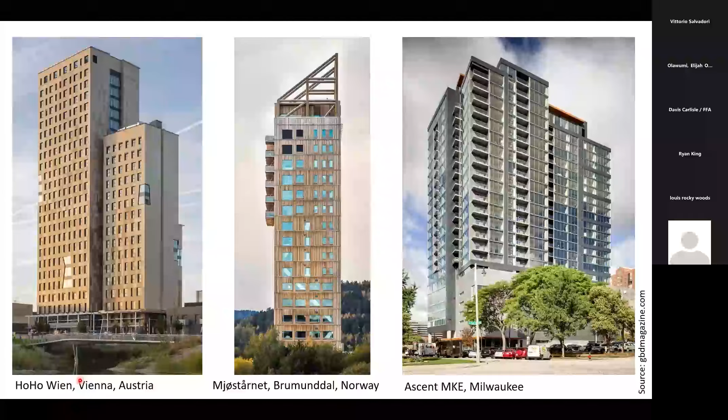So mass timber, these are the prime examples of what comes to mind when we talk about mass timber, from the forest to the tallest buildings ever made by humans in wood, right? The HoHo in Vienna, the tall building in Norway, which once was the tallest, the Milwaukee building, which may still be the tallest mass timber building in the United States. So these are the prime examples. This is what we are proud of, right? The white unicorns, things that stand out like the Eiffel Tower, and demonstrate the ability of the industry.

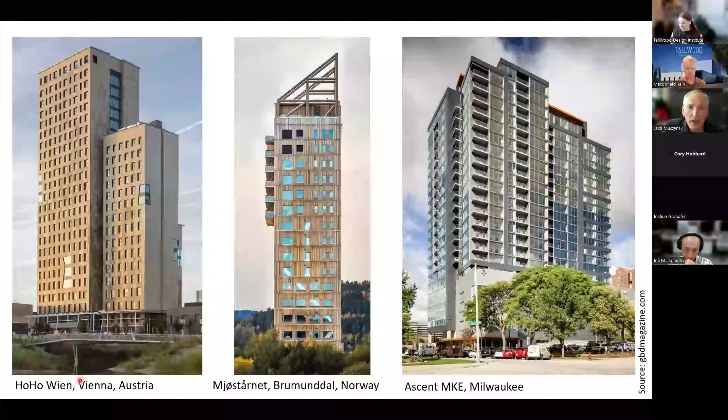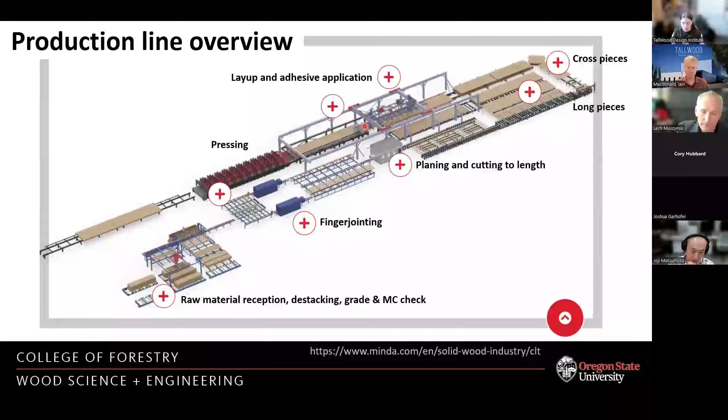Laying up needs to be one layer of lumber, then a layer of adhesive, another layer of lumber, this would be the cross layer, another layer of adhesive, another long layer of lumber, and so on, as many times as many layers as you would need. Followed by pressing. These are large area presses that first popped up specifically for this kind of product. There wasn't anything like this in the world before CLT arrived. Well, there were big LVL presses, big plywood presses, MDF presses, but nothing of this size and capacity. And at the end, the panels are CNC machined and finished.

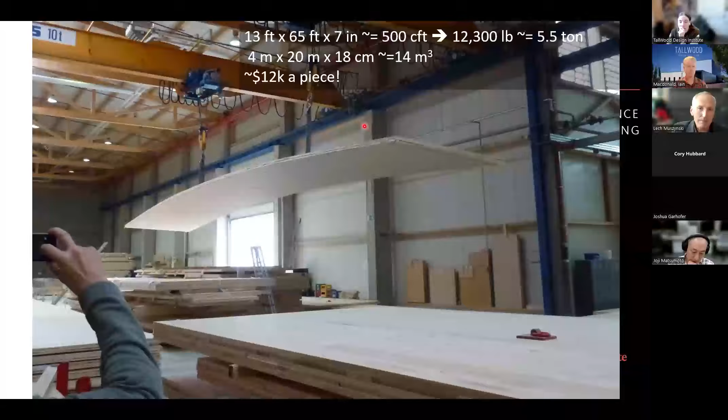The result may be quite impressive. It's up to 13 feet in width, 65 in length. This would be about half a thousand cubic feet, right? Or I'm more familiar with cubic meters, so it would be about 14 cubic meters. It may weigh about 5 tons a piece and be quite expensive a piece, which is going to be important as we go further.

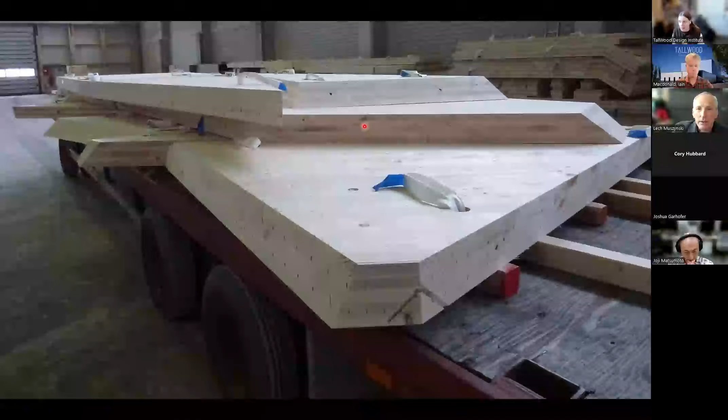Now, this bulk, the mass of timber, gives it the unique fire safety feature. It does not burn easily, and it's not easily engulfed in flames. It's exposed to fire just from one side. So this is an attribute that we like to brag about. And then CNC machining allows us to cut it in all kinds of intricate ways.

This is important because panels, when you work with glulam beams, beams need to be elaborated at ends and at places of support, but this is it. Now, panels need to be connected with other panels, and then they need attention around the perimeter. And then you may want to cut openings in them, and some of them do not have to be rectangular.

All of this can be done on big CNC centers. If you don't know what it is, it's like a large robotic frame that handles machine cutting and machine finishing tools, molders, saws, and follows pre-designed shapes, and can cut at any angle you may want.

Now, essentially, this is an old story. If you think of the technology, there is not much new in here. The cross-laminating of wooden elements has been known since Egyptian times, right? They were like cross-laminated slices of veneers used for fine furniture. But the first modern patent for what we now call plywood was issued in 1865. Then followed by the first adhesive bonded glulam used in Europe in the late 1800s.

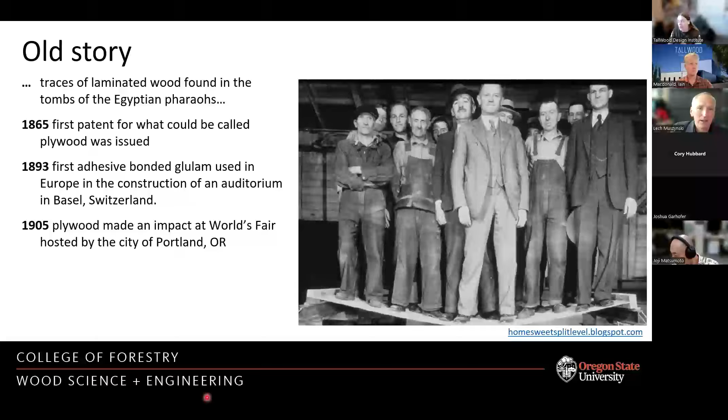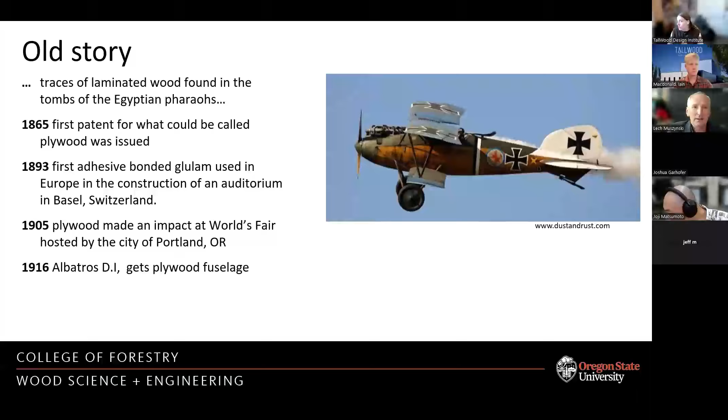Then in 1905, plywood made an impact at the World Fair hosted by the city of Portland in Oregon, where Iain is sitting right now. Plywood shortly became a strategic material, right? Used in fighter planes, even in the First World War, even more in the Second World War. This is actually what propelled the science of layered composites before carbon fibers and glass fiber composites appeared.

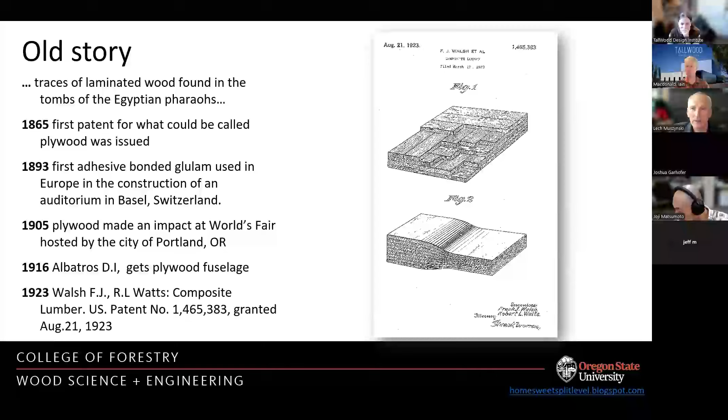And then in 1923, we find there was a patent for something that looks eerily like cross-laminated timber, if you look at figure one. So essentially, there should be no surprises in here. In 2013, architect Michael Green, in his TED Talk, referred to CLT as plywood on steroids, right? There's a quick connection. Conceptually there is no difficulty in here.

So today this should not be a new material for us, and yet the industry continues throwing surprises and posing baffling puzzles for us. And not the least important of them would be the uneven pace of developing production capacity. When we look at the global regions, at certain places it seems to go faster, at others slower, but even more unsettling, the uneven rate of attrition across the main regions. By attrition, I mean some companies fail, and in some regions, more of them than in others.

Yeah, things happen. If you look at this list of CLT facilities, CLT plants, lines being closed, repurposed, repossessed, collapsed, or burned, or restructured, the list is very long. The unsettling thing in here is that in the last 6 years, actually less than 6 years, North America lost 5 major CLT operations. Yeah, they have been restructured, right? But something went wrong in there.

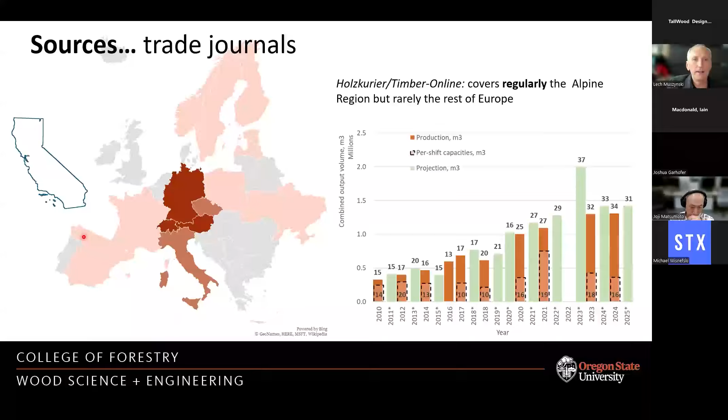Now, by comparison, if you want to see the scale of how big this area is, it's about the size of California, right? Not the least of the states, not the largest, but this is to scale.

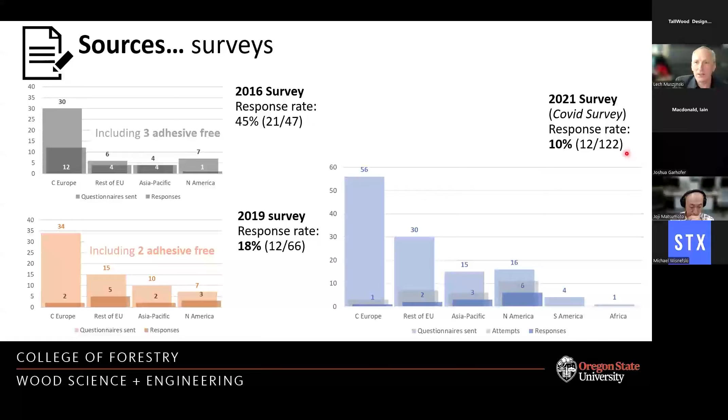So now the other source is surveys. We've conducted a total of 3 surveys, with the first one being most successful with the greatest response rate. And then as we went, probably manufacturers got tired of everyone asking them questions and sending surveys. The return for the effort was diminishing. And you can see that the last survey that we sent to a whopping number of companies, 122, got just 12 responses, 10%. At this point, a much better source of information is direct site visits and interviews with companies and company representatives at trade shows and so on.

So when I interview people, I have had a semi-structured questionnaire since 2017. Before, it was more open-ended. And this questionnaire is evolving to harvest as much information as I can. Now, in terms of the site visits, quite often, and then I had to make it a blanket policy, I could not take pictures that could be published anywhere or shown. So I'm going to avoid showing you pictures from individual sites, except for the few for which I have a specific agreement to share the image. Otherwise, I'll be just showing aggregates that will not allow you to track the data back to the original source.

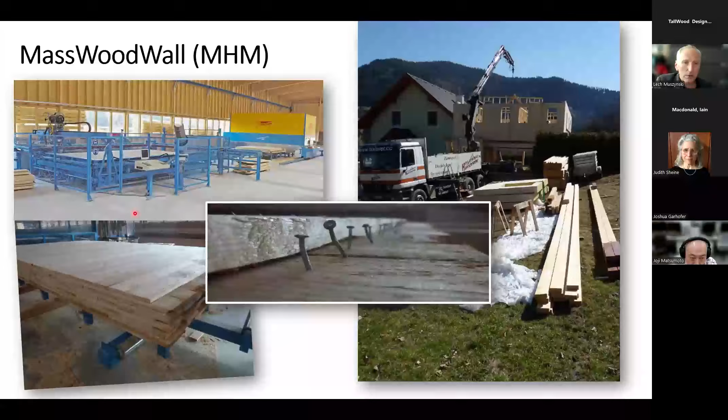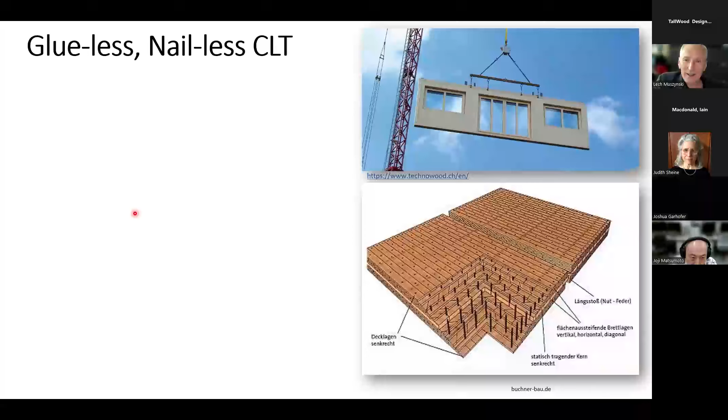The other glueless and nailless option would be dowel bonded cross-laminated timber. For a long time, I believed this is just an academic exercise, but no, there are companies that do this in real time. There is a company called Technowood who produces entire turnkey, highly automated robotic production lines for this. There are currently about 12 companies doing it that way, mostly in Switzerland and Austria. So this is just a footnote that what we call cross-laminated timber may have many flavors beyond what we imagine as an adhesive bonded cross-laminated panel.

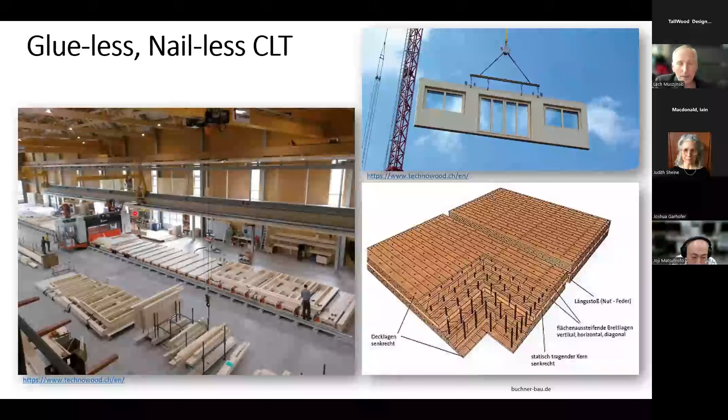Another flavor, this picture, sorry, is historic. This company does not do it quite that way any longer. They are still in operation, still do glueless and nailless CLT, where cross-laminated panels are essentially locked in each other mechanically, like a wood puzzle, rather than bonded with any physical connectors or adhesives.

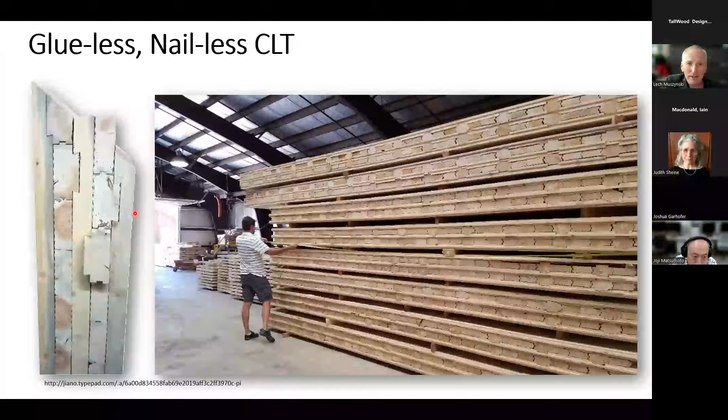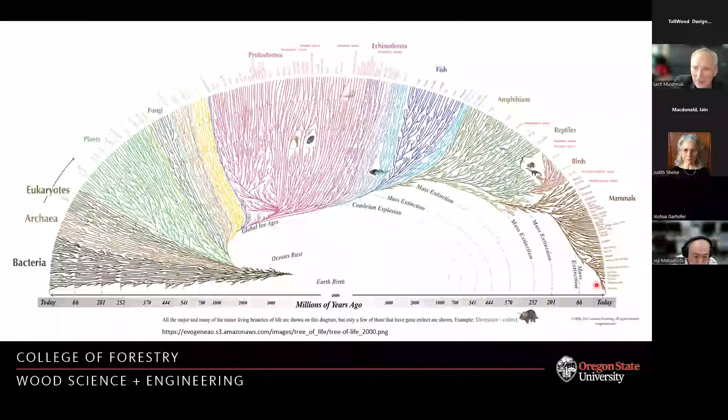So I like to compare it to evolution, right, a process that results in diversity of outcomes, diversity of products, processes, approaches to business. And this is a first cautionary tale. If people travel to this epicenter of CLT manufacturing in Central Europe trying to find a model for their business, it very much depends where they go, whom they talk to, because you may end up anywhere on this tree of evolution without seeing the entirety of what actually happens.

So what we learn: the state of the industry is strong. No, I'm kidding. Well, this is actually what you would hear from most publications focused on mass timber. There's a barrage of very upbeat messaging about mass timber. It's green, yes, of course. It's strong. It's developing, gaining popularity, right? That's my favorite shortcut, gaining popularity. What do you mean exactly? And the growth is exponential. I would agree with this statement, right?

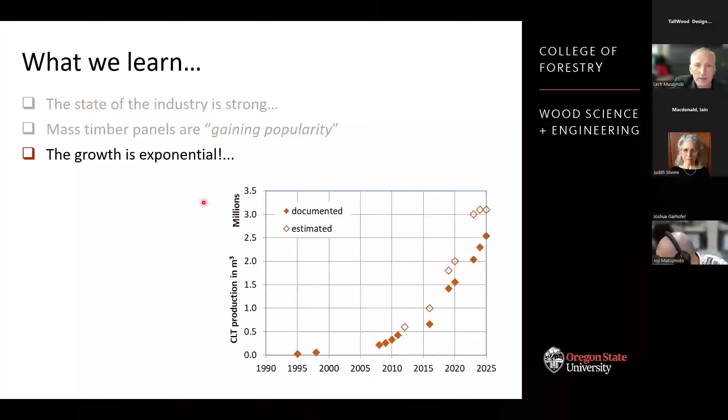So this is data from external sources from the past until 2013, and then starting from 2013, accompanied with my data, both documented and estimated CLT production across the globe. And it's exponentially rising towards 3.5 million. The latest data is for last year. I'm a scientist, right? I can fit an exponential line in there, both to the estimates and to the documented volumes, and all of them are reliably exponential, right?

So it's been referred to as plywood on steroids, right? Global plywood output currently is about 140 million cubic meters. This is an estimate from 2023. What did I tell you was the CLT output right now? About 3 million were the steroids, right? That's a rather small potato compared to plywood, the most similar product, the original idea for this product. Okay, are we going there?

Famously, you can straighten an exponential curve if you put the y-axis in logarithmic scale. So instead of million after million, we start with 1/10 of a million, that would be 100,000, then 1 million, 10 million, 100 million. This is where global plywood was in 2021. I should have moved this to 2023, and it would probably be somewhat higher. This is where CLT is right now.

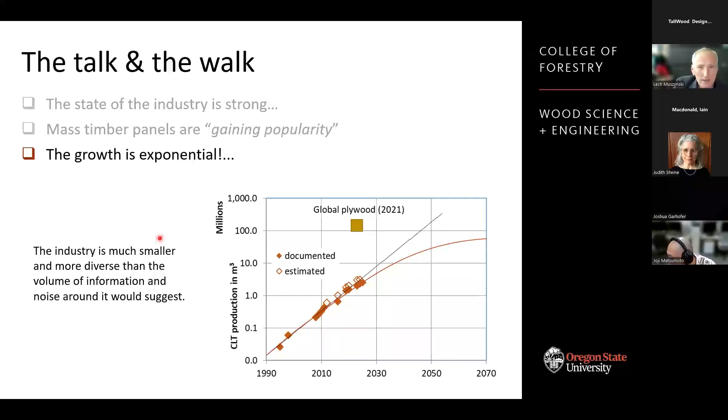So it looks like CLT may be at this level about 2050, and that's if things go really well. The recent slowdown may actually get us to the level of plywood somewhat later in time, right? So this is the first warning. It's not a big industry, right?

So this is first. And by the way, this is just a footnote. Contrary to how this industry is being sold as super progressive, the female employment in the industry is rather minuscule. And if you look at who is being employed in there, management and production would constitute a relatively small fraction of the employment, but CNC machinists, engineers, designers, salespeople, logistics specialists, administrators would weigh relatively heavy in this employment.

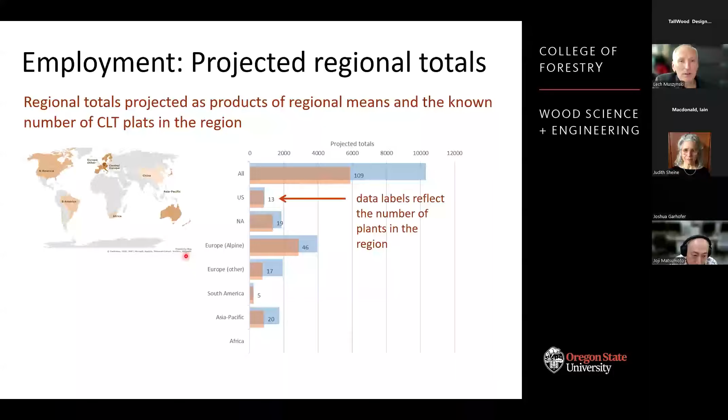And then if we project, because I don't have data for the entire region, I would have to just project this rate based on the size of the company to see how many people may be employed in this entire industry. We said it's about 12,000, not even 12,000, about 10,000 people globally employed in this industry. And of those, who work with CLT directly would be about 5,000 people. It's a small industry, right? 5,000 people globally would not be much.

So I like this quote. It's not my own exclusively, right? The authorship is shared. More than a decade since launching the first structural CLT line in the US, and that would be D.R. Johnson, right? There was a pre-existing operation in Montana, but not producing structural CLT. This was access mats. Mass timber remains a minuscule fraction of the construction market in this country, right? But in other countries as well, with the design and construction industry focusing on bespoke, high-profile, high-cost, high-rise projects that have greater impact on public imagination than on forest and built environment.

I mean, imagination is important, right? This is what the Eiffel Tower did to steel construction. This is what these large buildings do to CLT. So it should not be understood as diminishing the accomplishments of the industry, but it's an important signal on how we speak about this industry and what it actually represents in real life numbers.

It's one of my favorite slides. It comes from a report done by a consortium. Here you have authors Roy Anderson from Beck Group, Erica Spiritos, Nick Sills, and Catherine Slavin, who put together a report on the Pacific Northwest regional mass timber market study. And on this graph, what you see on the left side are all logs being harvested in this region, and then showing us how these logs are being used in different kinds of products across the forest product industry.

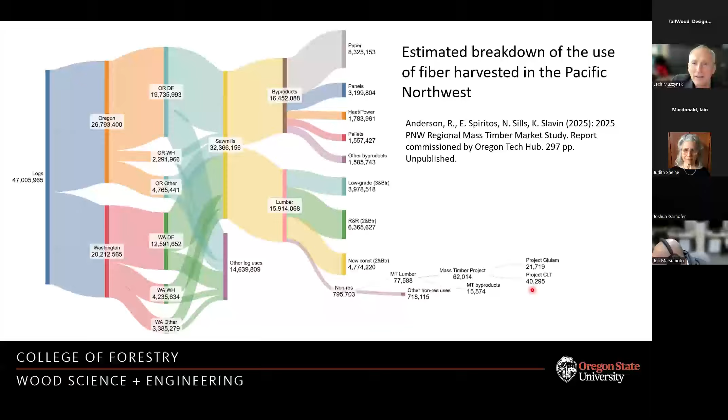At the bottom of this diagram, you see non-res, other uses, and then mass timber lumber. Of this, how much goes to mass timber projects, mass timber byproducts, project glulam, project CLT. My goodness, this is a very tiny proportion here. Is mass timber going to clean our forests from lumber? No, not anytime soon. Okay. So this is something to conclude in flight here. This is not the end of my talk, right?

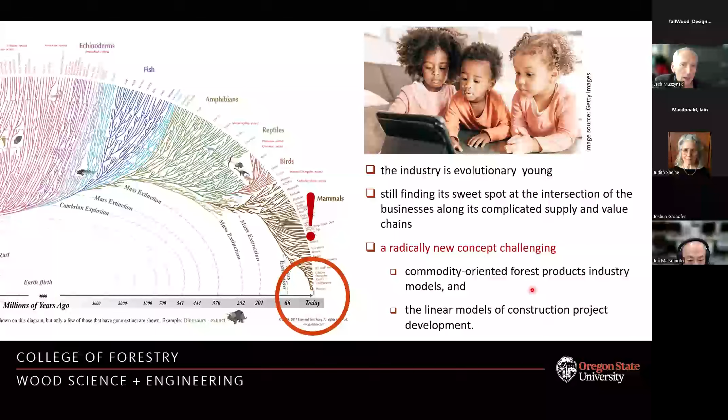The industry is evolutionarily very young. It's still finding its sweet spot at the intersection of businesses along the complicated supply and value chains. And it's a radically new concept, challenging commonly commodity-oriented forest products industry models and the linear models of construction projects. We're going to discuss it in a little while. So, as we said before, it's quite vulnerable. I mean, young age is the age of vulnerability, right? Many things happen, but there is a cost.

Let us take a look at this global output and capacity. I already told you it's like 3.5 million at best right now, globally, compared to 140 million cubic meters. How is this CLT volume being distributed across the globe? Let's see first by the number of plants, right? This would be one way of looking at it. How many plants produce cross-laminated timber across the globe?

And you can see here, like Central Europe, right? These numbers, by the way, I intentionally show you somewhat older numbers, so don't pay attention to the numbers, just to the proportions here. About two-thirds of the existing lines producing CLT are located in Europe, right? Of those, nearly half in Central Europe. North America would account for a slice in here.

Relatively large number of plants in the Asia Pacific region, a small amount of two. Back then it was just four plants in South America. Now, a very different perspective when you look at the annual output, how much is actually being produced.

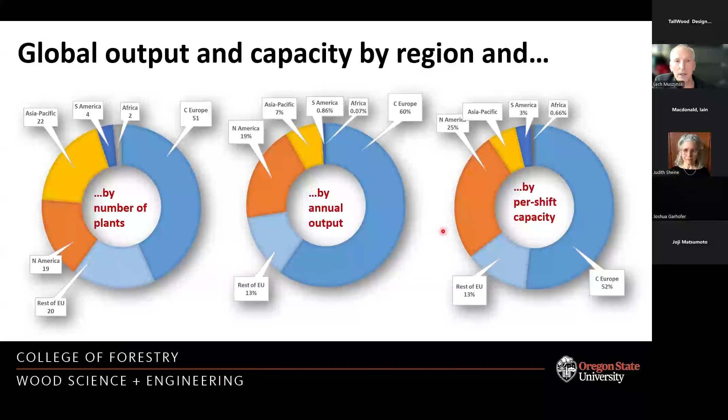Okay, so keeping in mind, this is the proportion. Essentially, everything that is being produced is being installed. There's no waste generated, right? All panels being pressed are being pressed for specific projects. So this is reliably the volume of panels actually being installed in structures. Does the size matter and how much?

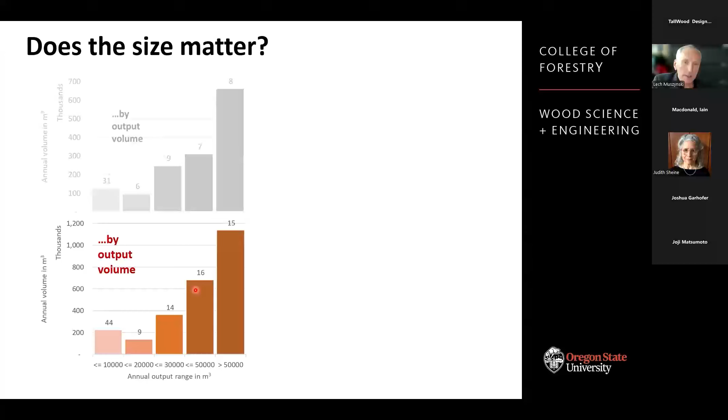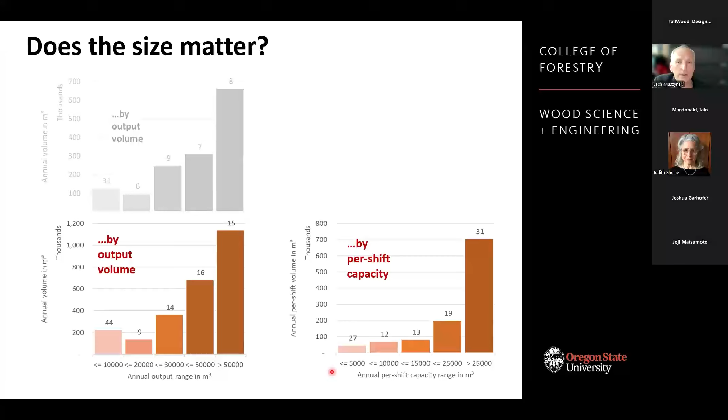And then by per shift capacity, right? Again, there's a great number of businesses that have relatively low per shift capacity, and yet they are contributing relatively good volumes to the global production, and still finding a niche in this market to serve and earn profits. This is again how it would change in a relatively short period of time.

So now there is also lots of discussion about what is the best type of fiber, the best raw material for cross-laminated timber. For North America, the PRG 320, which is the product performance standard for CLT for Canada and US, the requirements are relatively low. Any species or species combination recognized by ALSC PS 20, product standard 20, that has specific gravity larger than 0.35.

These species tend to be listed in the NDS, the National Design Specification. So the design values for the raw lumber are known by grades. And then PRG 320 specifies that for producing CLT, it is enough that the longitudinal layers are made of number 2, which is not the highest grade in this market. The highest is select structural, then number 1. Number 2 is the third in the row. It's relatively inexpensive lumber. And transverse layers could even be produced with number 3.

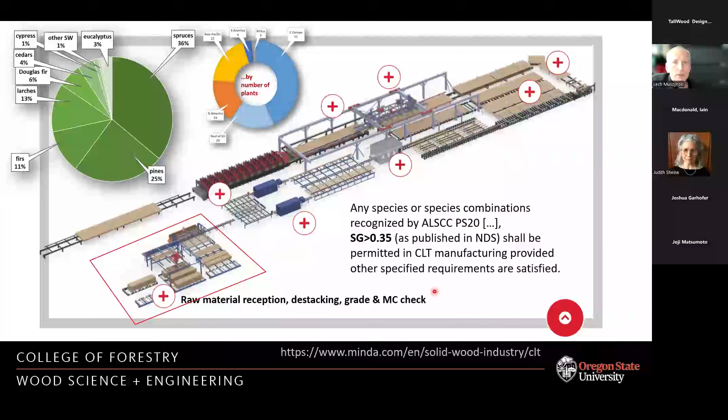larches. The key is essentially whatever is available in the region, whatever in a given region passes the criteria for the region, because in Europe the criteria may be somewhat different. So this would be a comparison. The pie for Europe would look much more like the global pie, just because about 2/3 of the production is coming from Europe, and the most commercially available species in the Central European region tends to be spruce. And then in Nordic countries, it's going to be spruce again. So this is what drives these pies, right?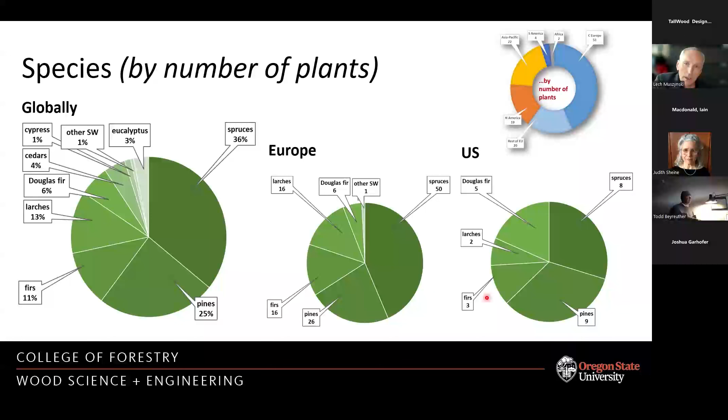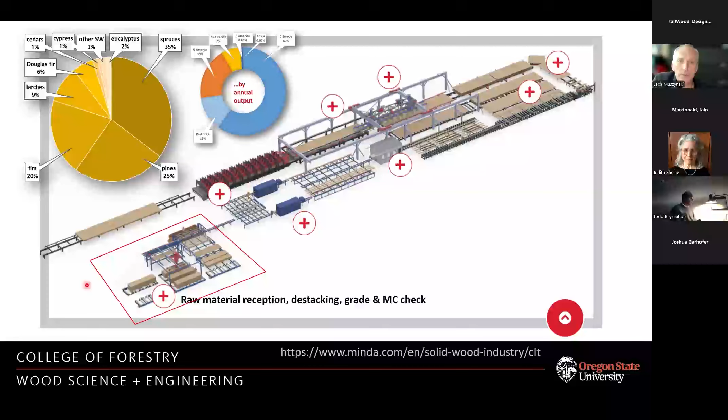By comparison, in the US, it would be spruce-pine-fir as a combination, a little bit of Douglas fir. But again, there is no magic in there. Whatever is commercially available. Could hardwoods be used? Yes, PRG 320 now has language that allows hardwoods as well. If we look at the actual annual output, so if we scale this pie by volumes produced, the pie chart would not change much. It would still be spruces, pines, firs dominating. And this is again because the largest volumes are being produced in Europe.

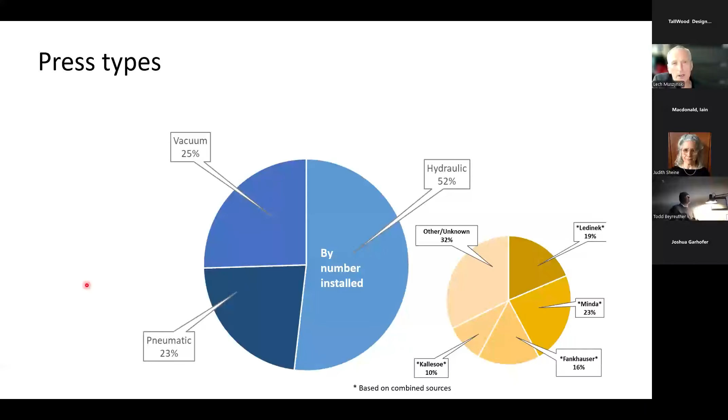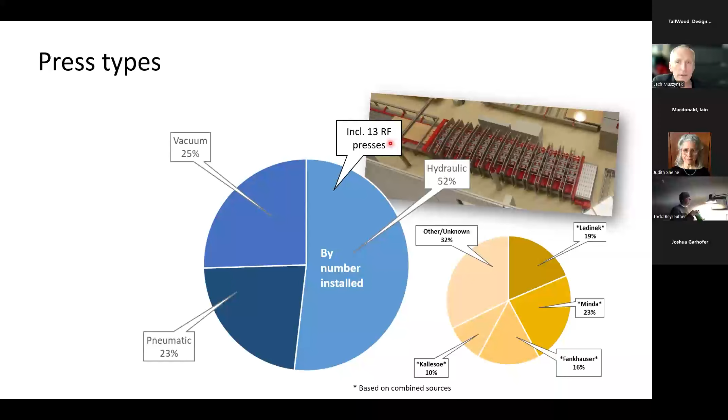Now, the next misconception is that there is some magic to pressing, right? There are essentially three major types of presses that we see. Hydraulic presses, about 50% of operations by numbers installed, where the pressure from the top, bottom and sides is delivered by hydraulic pistons. This includes about 13 radio frequency presses, which are an interesting concept because they allow you to cure the adhesive at elevated temperatures. You don't need to press the entire area at once; they press one segment at a time, curing it under radio frequency for about 5 minutes, and then moving the layout forward. So this is the hydraulic presses.

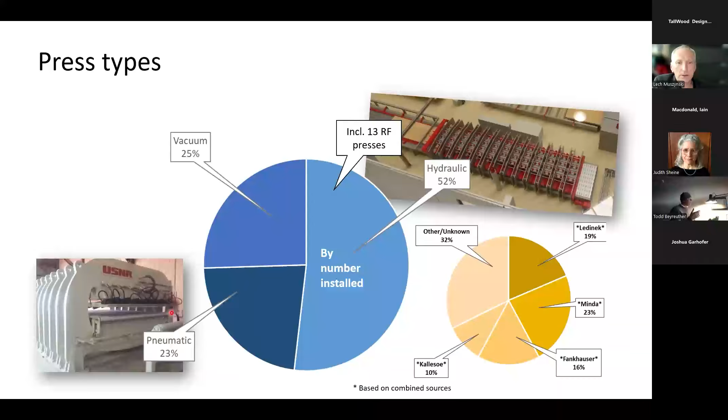Pneumatic presses operate on more or less the same principle, but the pressing power is delivered by pneumatic pistons. But then vacuum presses. This is an interesting concept that I'm going to explain a little bit. I was personally surprised when I first started on this quest. I thought that vacuum pressing was a footnote of the history of CLT development. I would tend to think that there is not enough clamping pressure. The typical clamping pressure is about 150 psi for the hydraulic and pneumatic presses. By comparison, atmospheric pressure is about 15 psi. I can't remember exactly, but this would be about 100 kilopascals, so 1/10 of a megapascal. This would be 1/10 of what is being exerted in these presses.

Can you get a good product out of this? Well, apparently 25% of manufacturers believe they can. And they have existed long enough to prove that it is possible, and they pass local standards for quality. In terms of the brands, here is an example where I got agreement from all of these manufacturers to share their names on this chart. It'll be Ledinek, the Slovenian company, about 19%, Minda, about 23%. Fankhauser is the manufacturer of the vacuum presses, about 16%. Kallesoe is the manufacturer of the RF presses, about 10% of the market.

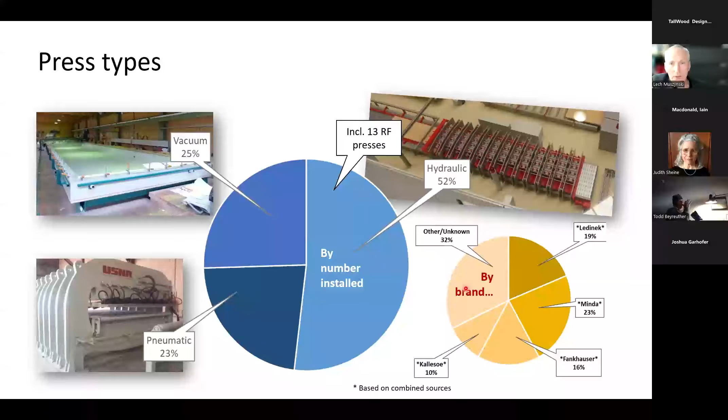So you see, the market is, we should not say dominated, but increasingly the dedicated manufacturers of specialty hardware are taking a greater and greater slice of the pie. It used to be that the field was dominated by do-it-yourself presses. The manufacturer would design a press that they thought would work for them and just order this press to be assembled for them. You can still find a lot of them. And there is, of course, a margin of operations for which I really don't know what they operate. This is a vacuum press. Essentially, it looks like a big wading pool with a silicone.

Yes? Is there a question?

No, I don't hear a question.

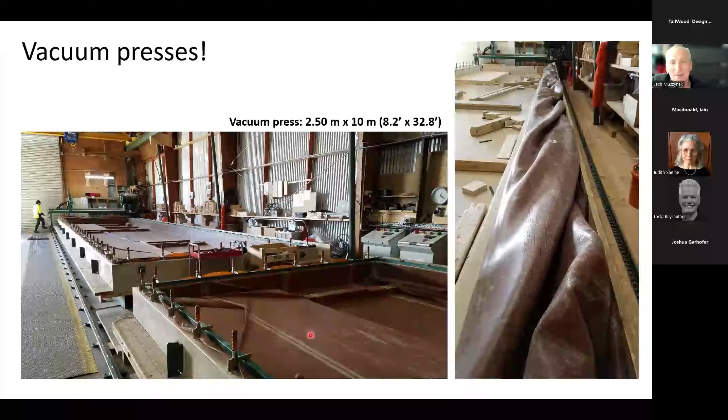Okay. With a silicone blanket that is being wrapped around the layup in here. And the air is being evacuated and just atmospheric pressure assembles or presses the elements together. This could be done that way or in a very smart way. The best company that operates it, that I've seen, operates as many as 18, close to 20 of these presses that they can cut off the vacuum and stack presses one upon another.

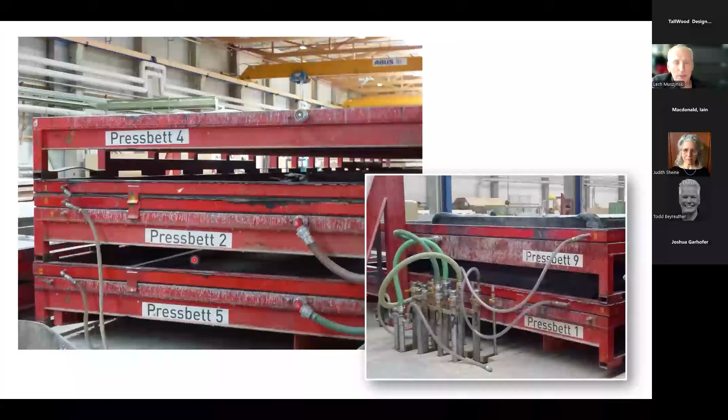How am I doing time-wise? I probably spent too much time on some of these items.

In terms of the press sizes, there seems to be like a sweet spot that is being driven by what can you put on the highway without additional penalty, not generating something that would count as an oversize load. On the other hand, it needs to be viable for construction. So there is certain minimum size beyond which it would not be practical to produce these panels. We've been there. This pie chart shows you the difference between a number of presses installed versus how much they contribute to the production. Let's go to the next one.

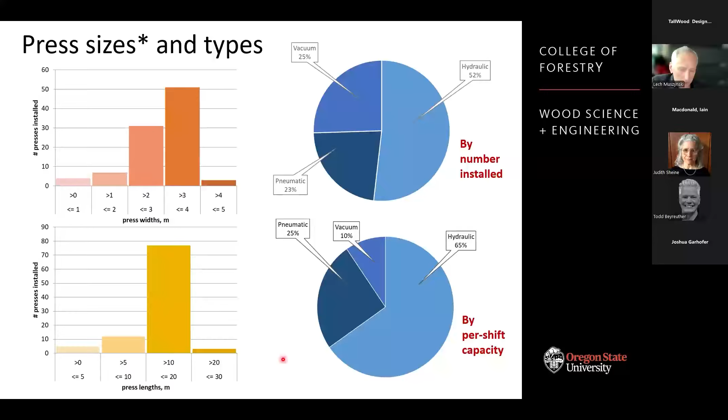Binders, adhesives, again, being talked about quite a lot. And then again, there is no magic about adhesives. The polyurethane adhesives hold the majority of the market by number of lines operating it or by the volume. That comes just from historic development. They were the first to deliver a cold curing adhesive to this industry. So many operating manufacturing clients would adopt this adhesive first, and then it takes time, effort, and money to switch to something else.

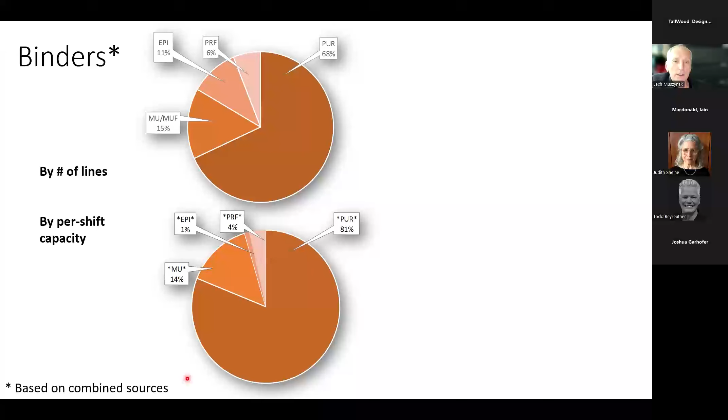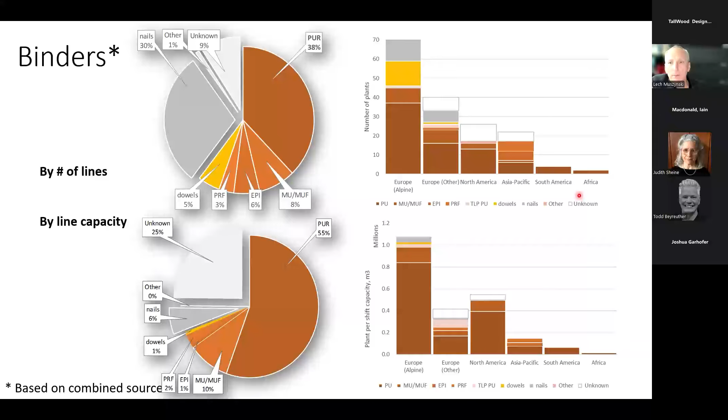So this is how the share would look like if we include these mechanical binders in there by number of operations. However, if we look by the production capacity, this would be a relatively minuscule slice of the market. Still, the majority of cross-laminated panels are bonded with adhesives. This use of adhesives and binders varies widely by region. And if there are questions on this, we can return to this.

The next differentiating thing is the business model. This would be an outline of a typical commodity supply or value chain for engineered wood products, right? There would be linkages to harvesting, primary processing, industrial hardware, which is necessarily part of these adhesives if these products are adhesively bonded. But then what happens to the product is not the manufacturer's business, only as much as they need to know what should be the quality. It's the users who decide how to use it, okay?

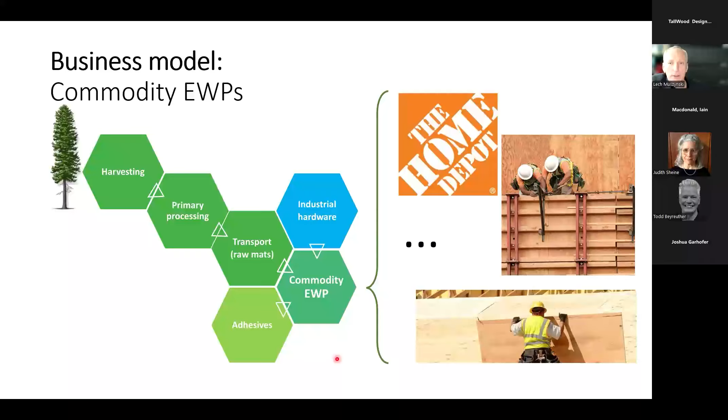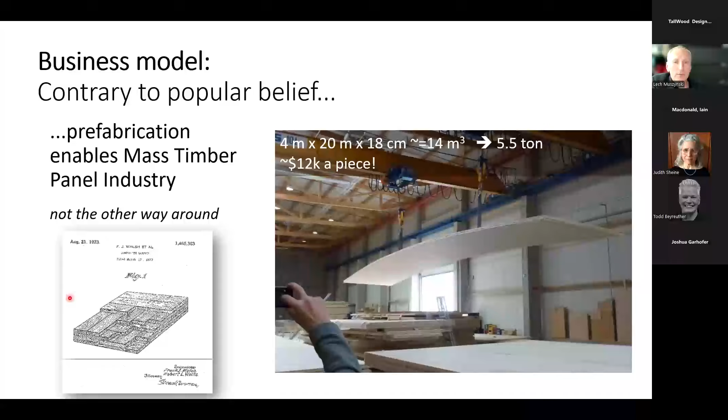Now, it's very different with the mass timber panel industry. Contrary to the popular belief, prefabrication enables the mass timber panel industry, not the other way around. This is why this patent from the 1920s could not turn into a viable business until now. You need the ability to CNC these large pieces with a level of precision to turn them into viable elements for construction. So this necessarily integrates the elements of mass timber design, manufacturing technologies, and construction, because in order to manufacture these large behemoths and cut them to prefabricate them for the design, you have to have the design first.

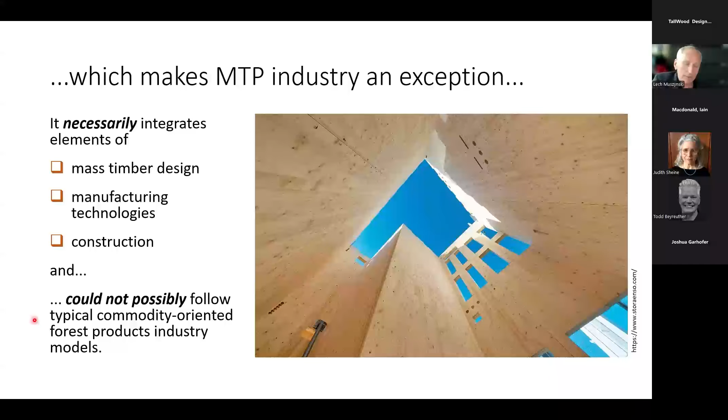This makes it into a non-commodity product, essentially a specialty product. No panel is going to be made or pressed until you have a design finished to the minuscule detail. So this is a problem and an opportunity.

One of my favorite quotes in here: it used to be that you either shop fabricate unique objects or mass produce very repeatable elements. But then with the emergence of CNC capacity, we can mass produce or semi-mass produce very customized elements, right? And all of them to quite specific orders. This is what is unique for this industry when you compare it to anything else in forest products.

So generally, again, if we compare it to the typical commodity type of structural products, construction is just one of the many options in which these products can be used. And construction is remote, a couple levels by quite a distance, right? It's quite different with mass timber panels.

Part of the supply chain for mass timber panels must be architectural engineering design, project management, but also what happens on the construction side. So typically all of these participants of the supply chain would be involved in the project early. I mean, the manufacturer, architect, and the contractors would sit at one table and try to figure out what is the most efficient way of designing this thing for manufacturing panels that would work best and most efficiently for a given project.

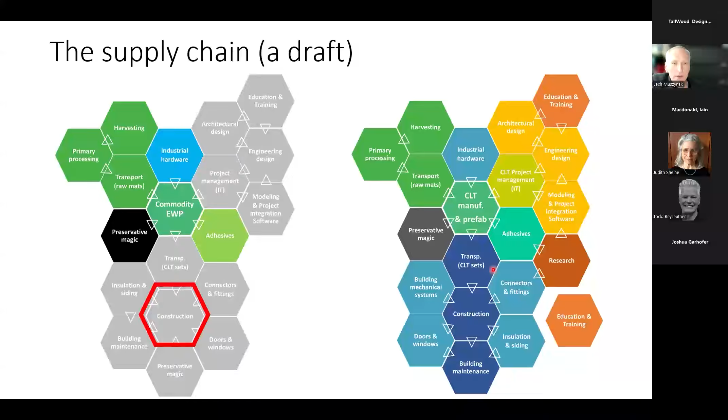And this would be repeated from project to project until you get to a typical project that could be repeated many times. So CLT may become a commodity only in the second degree, as having a commodity type of project. This creates strong incentives for vertical integration. And again, from what comes from our surveys and interviews, many companies are vertically integrated. And this incorporates things on the green part of the integration.

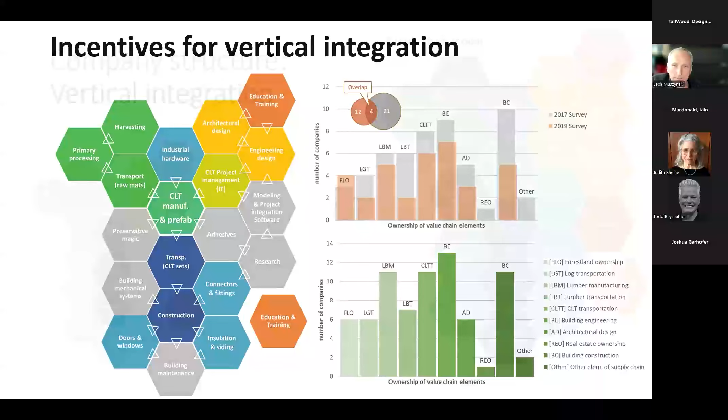Many CLT manufacturers not only have the sawmills, but actually are involved in harvesting and ownership of the forest lands, but they're also involved in design and in the construction. Typical models of vertical integration would be either coming from the design side, or incorporating the green chain, while the other parts would be optional, but there would be a number of companies that would incorporate elements of this under the same roof.

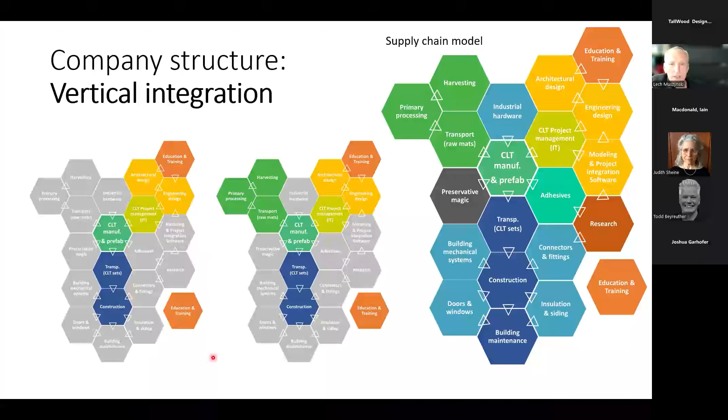This inspired me to look at the data that I collected in a similar way. If you look at the place of manufacturers, here would be Mercer, former Katerra in Spokane, CLT, how far they are from the closest urban center of 100,000 inhabitants or more, and how far they are from the closest raw material source, that being a sawmill. And then if you aggregate it across regions, you would have average distance to the nearest sawmill. This would be the average distance for North America, and average distance to the nearest urban population center. You see that this shows a tendency of companies locating themselves closer to the raw material resource than to the place where they deliver projects.

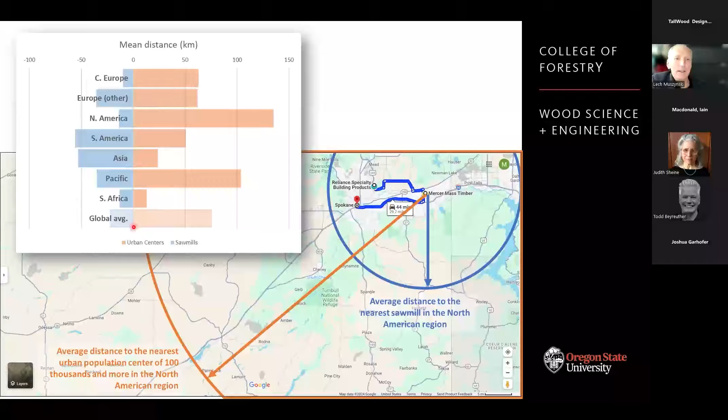If we take it somewhat further, what would be the population, not just at the closest urban center, but how many people would live within the 50-kilometer radius of the operation. Speaking again about the opportunities for projects, you will see that here, surprisingly, the differences would not be as stark as with the actual distances. If we look further, this is how this would compare percent of the sawmills and percent of the resource base within this reference radius. This takes us to another thing.

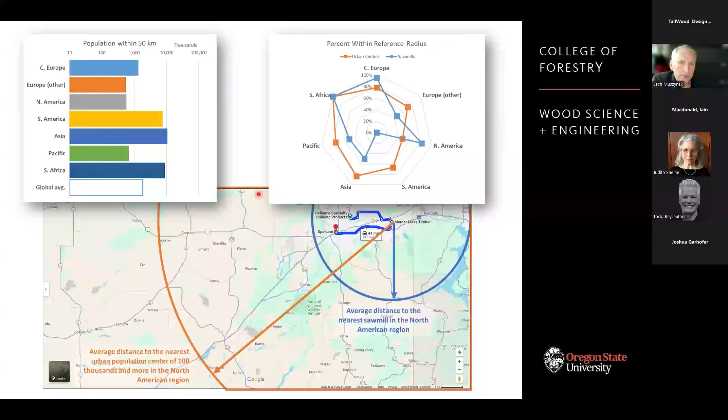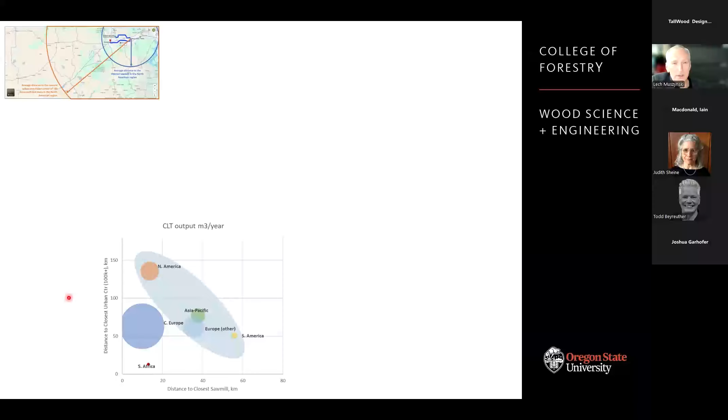If you put it on the scale where the distance to the closest sawmill and distance to the closest center are put on this graph like this, and the size of the blob shows the annual output in cubic meters per year, so a proportion. You'd see Central Europe being here, the rest of Europe here, North America here, Asia Pacific, South America, South Africa, and you would see there seems to be something like a trend, right? But this may be somewhat misleading.

If you take a look at where the individual companies may be, all of these gray dots are individual companies for which we know this data. This is kind of blurry, right? And again, the size here shows the annual output for individual companies.

Now, the next interesting thing would be what is the largest distance or the average distance at which companies deliver projects. This one can only be taken from what the companies brag about, and they typically have a list of the most advanced projects on their websites with locations. So it's relatively easy to track. So here you see as much data as we have for now for Central Europe, Asia Pacific, and South America. We are collecting these numbers for others. And this would be based on how many companies and how many projects.

We could not possibly do it for all companies. Not all companies publish this data. So 3 to 4 from each region, and we would mark the maximum distance and the average distance. So Central Europe can send their projects as far as 15,000 kilometers away, right? This would be the max, and substantially farther than any other region by average.

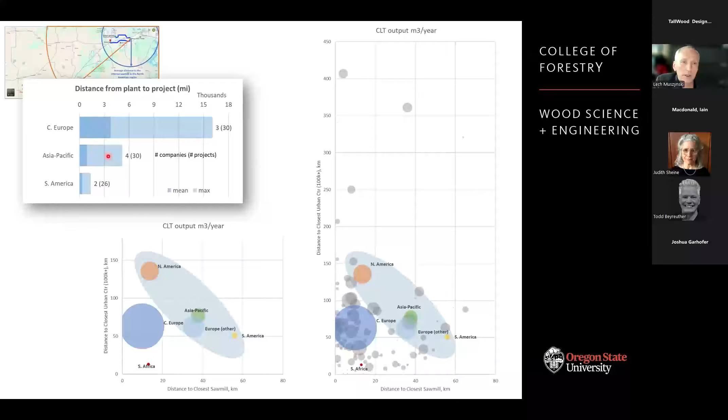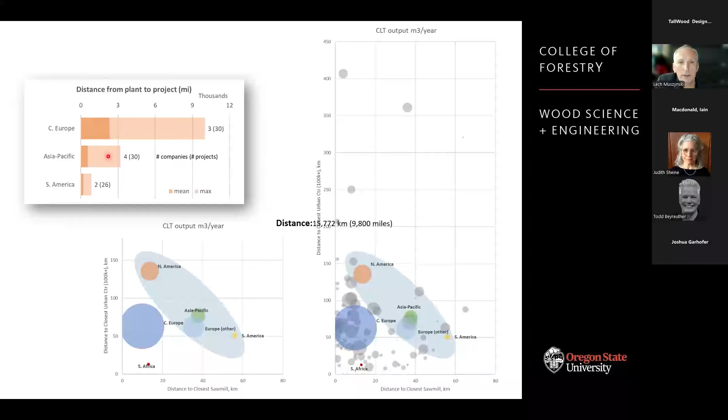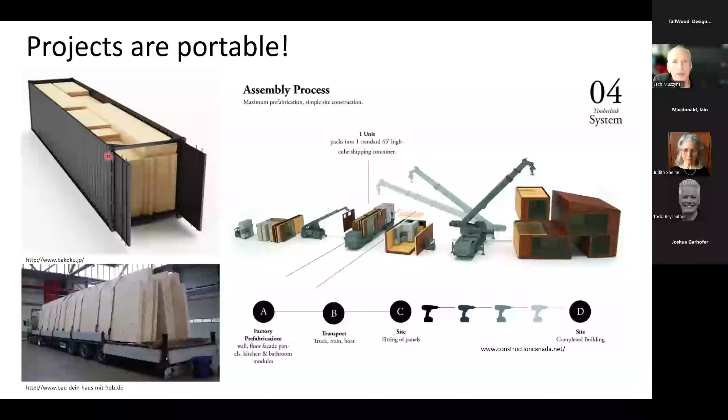So to conclude this thing, a message for the AEC folks in the audience. You're at the new frontier. Don't take anything for granted. Nothing is really set in stone yet. The integrating of the design, fabrication, and assembly should be taken very seriously. Talk to your manufacturer, talk to the contractor, do this work together. Design for assembly. The easier the assembly, the lower cost for the project, the greater accessibility, the greater volumes are going to be produced.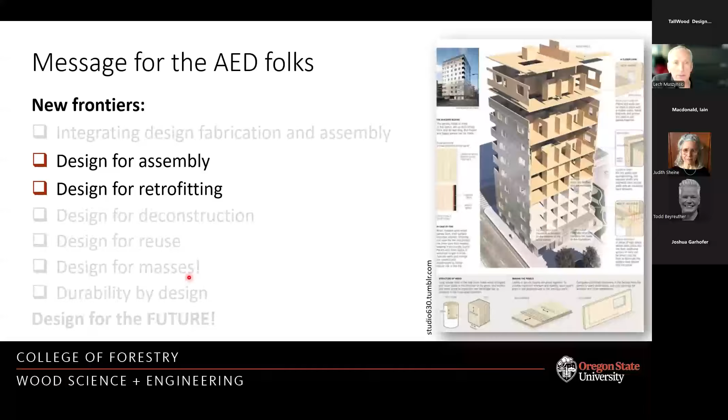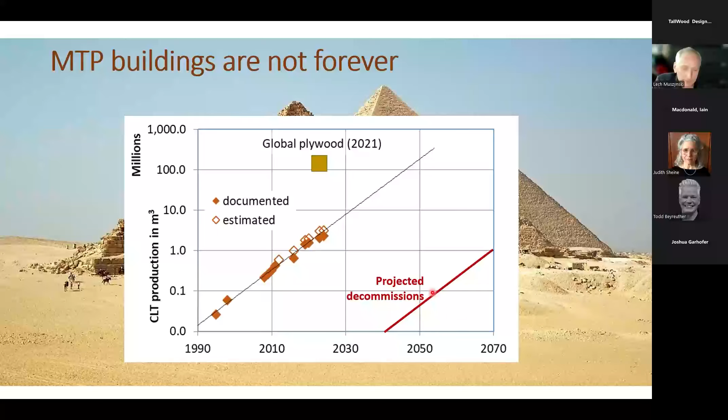We don't think about it too often, but design for retrofitting. What's going to happen if one of these walls inside is going to be destroyed by fire, flood, whatever, right? Design for deconstruction and for reuse. This is important because CLT buildings are not forever. They are not like pyramids, right? So as we see the progress of the production capacity, at a certain point, 50 years since production, we will start deconstructing these buildings. The buildings are going to be decommissioned for whatever reason at the same pace. Somebody is going to thank you. Your grandchildren perhaps are going to thank you for doing a good job designing for deconstruction.

Design for masses. Don't think white unicorns. One of my favorite places for CLT, a small town of Växjö, 80,000 inhabitants. At some point, it had more big CLT buildings per capita than any other place on this globe, right? Most of the buildings are apartments. This is the advantage of building boxes. You don't need to construct very intricate hybrid buildings where beam and post are executed in steel or concrete and only floor panels in CLT. Everything can be CLT in here. Walls and floors are load carrying, right? This is a big advantage.

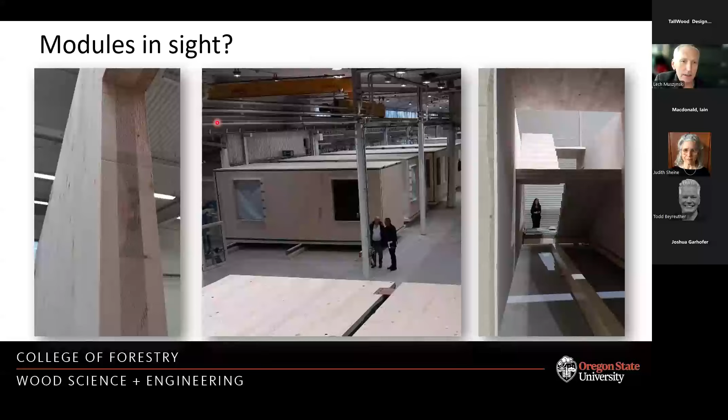Modules. This is the future for commoditization of the industry, in my humble opinion. Think of this. Closer to home, this is Ben Kaiser explaining this Model T for modular relief housing that can be produced in series, right, on a production line. Think of durability by design. Don't believe that some chemist magician is going to turn your daring design into something that is going to survive ages like pyramids. Do what Vikings did. Provide the durability by design, protect the fiber from the exposure.

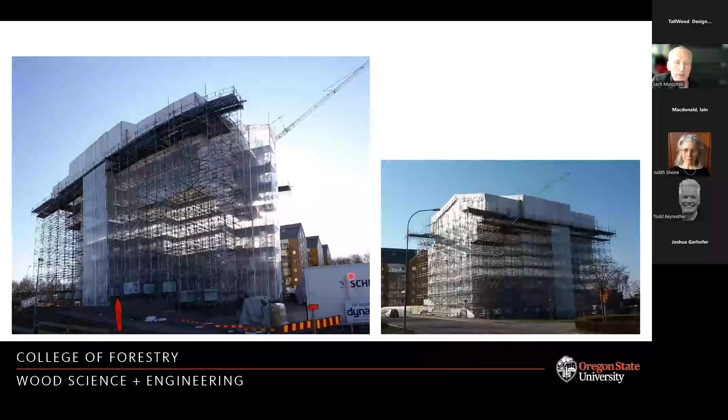This would be coming from the same Sweden, bad example, right? But coming from the same Sweden, an example of how they build to avoid the construction site being inundated with water or snow, right? The largest tent that I've ever seen was this one in the center of Växjö. This is a large structure. It dominated the landscape of the little town. And this entire structure had been built inside, and all of this landing space for the incoming material would be housed in here. This tent doubles for 2 overhead cranes. So if you think of the cost of the tent, this is essentially also working as a crane, and you pay for a crane anyways. Why not combine these functions?

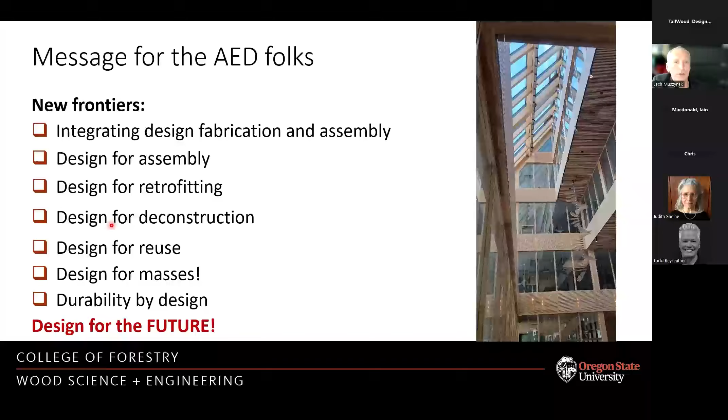This is how the building looks like today. Again, this is not the Viking way. I don't think the fiber is adequately protected in here by overhangs, but I'm keeping my fingers crossed. This is how the tent would look from afar on the skyline of the city. So again, design for the future, right? You're in the new frontier, think about it, design for the future.

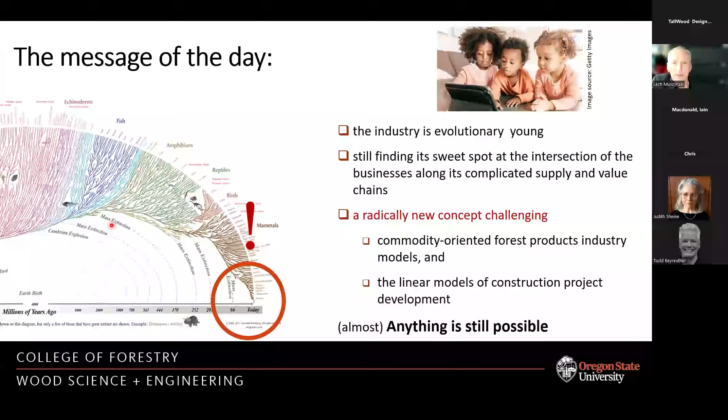The message for the day is this industry is really young. There are still many things that need to be decided. It's still boutique, small. So even small changes, brilliant inventions can move the entire industry in a very different direction. Anything is still possible. Well, almost anything. And I would like to leave you with this message.